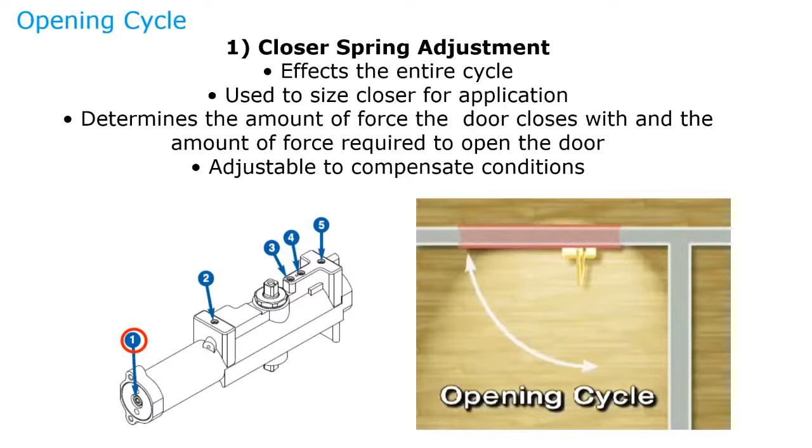Next, you have the back check. The back check is critical. The back check actually slows the door down as it hits the 70-degree point. This way it doesn't slam into a wall behind it. If for some reason your door opens up, and say you don't have a wall behind the door and it's allowed to open up to 180 degrees, then you would just back out the back check valve, and therefore it would be allowed to swing even further. This takes place normally around 70 degrees.

The next is the delayed action. This is the one option on door closers. Door closers don't normally come with this option, but you can order it. The nice thing is this will hold the door open for about 20 seconds, and during the 20 seconds, the door will close very slowly. It's a great feature for hospitals and places where you're bringing carts and gurneys through because it will hold the door open. It's really not a great option for external doors because it will let a lot of heat and cold in.

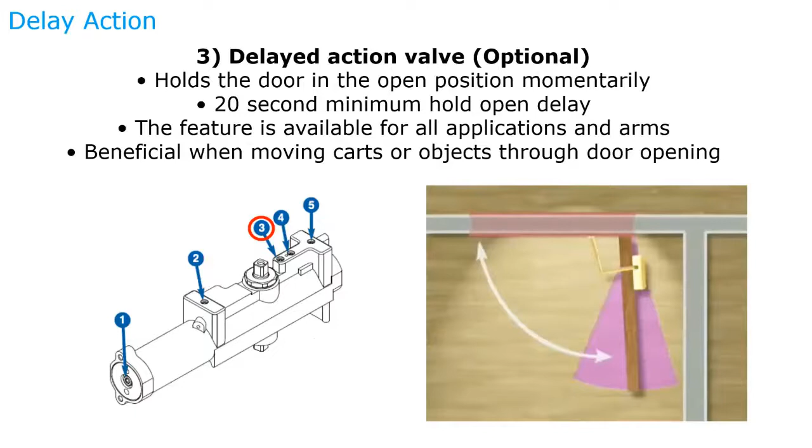Our next is our closing speed. Our closing speed is from the 90-degree point all the way to about the 12-degree point. This should take at least 5 seconds as a minimum. Most installers set it for about 7 seconds; make sure you don't have it closing too fast. According to ADA, 5 seconds is the minimum.

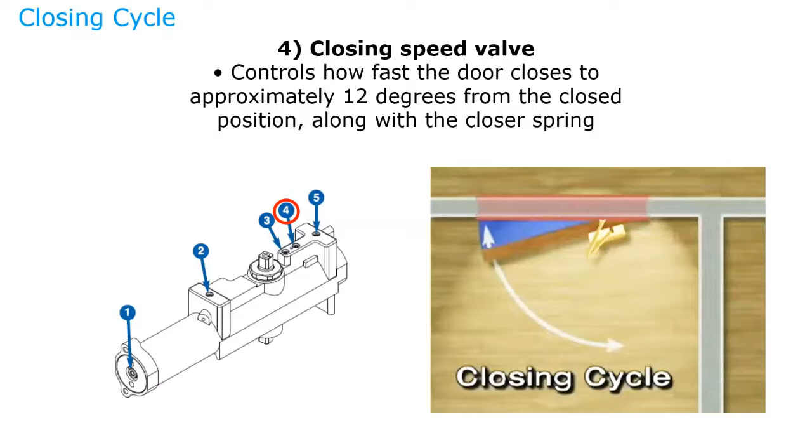And lastly, we have the latch speed valve. This is probably the most critical because this is going to make sure that the door closes and latches every time. Oftentimes you'll see the door closing very, very slowly, and at the very end, it speeds up. This is where the latch speed valve comes into effect, and this will overcome any weather stripping and make sure the latch bolts get pushed back and the door can close completely. This is the latch speed valve.

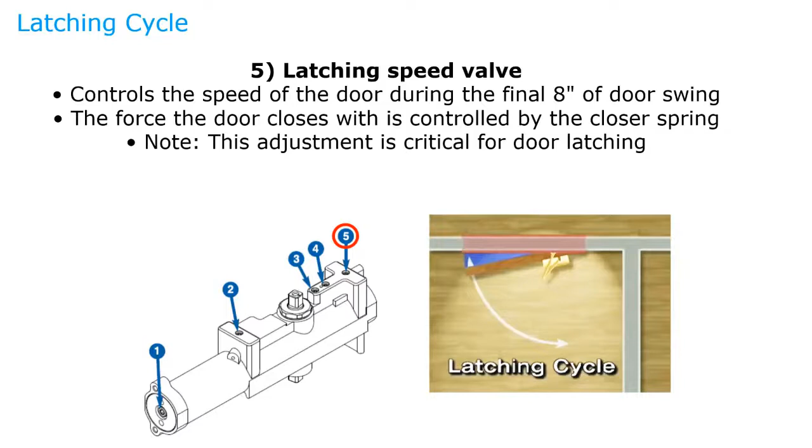As I just mentioned, according to ANSI A117.1, which is basically ADA, from the 90-degree point down to the 12-degree point, it must take more than 5 seconds. It can take 20 seconds, but it has to be more than 5 seconds. There's no maximum on how long it can take, but there is a minimum.

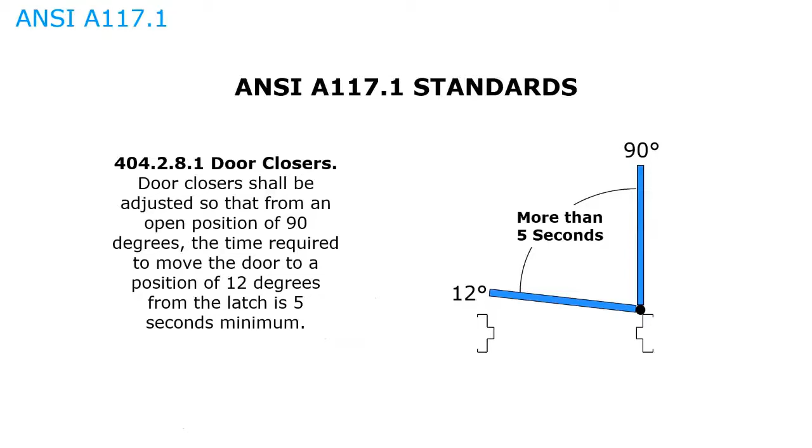Another very important ANSI A117 standard you should be aware of is that the maximum force to push open or pull open doors other than fire-rated doors should be 5 pounds for interior hinge doors. So when you're trying to pull the door open, it should be no more than 5 pounds. Something like this could easily be measured with a fish scale, where you put the fish scale on it, you unlatch the door, and then you pull the door open slowly. This should be under 5 pounds.

As you see here, there's a special note for fire-rated doors. Fire-rated doors have the minimum force allowed by the appropriate authority having jurisdiction. What that means is, say there's a lot of draft in the building, and a fire-rated door always has to close and latch. That's mandatory. And if you have permission from the authority having jurisdiction, and they say yes, you can actually increase the force of that to make sure it closes every time, that is allowed. So you can do it, because don't forget, fire safety is more important than ADA, because fire-rated doors have to do with life safety.

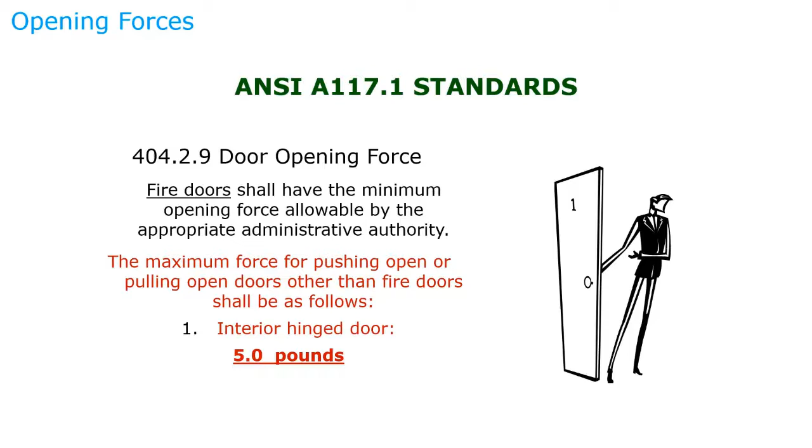We're going to take a quick look at installation, because this can be important, and you can always just take measurements to see if it's actually installed correctly. Because if it's not installed correctly, no matter what you do, you're not going to be able to fix the problem. So the first one we're going to look at is called a standard or a regular mount. It's always mounted on the pull side of the door.

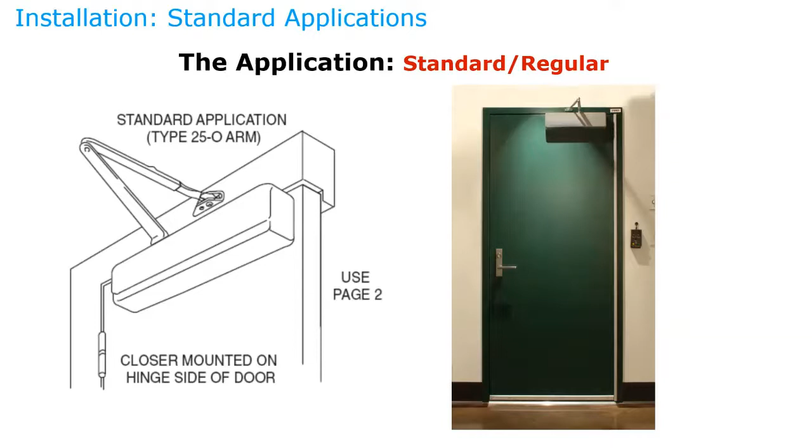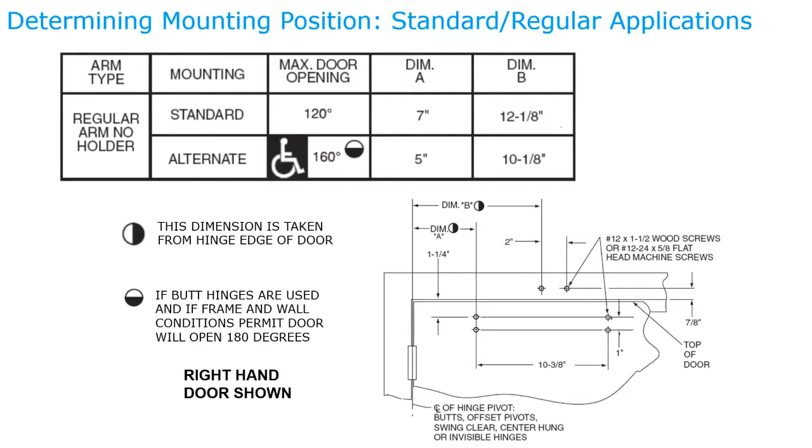Dimension A is from the center line of the pivot to the first mounting holes for the door closer. And you see it changes from 7 inches to 5 inches. So it does make a big difference. So if there's a wall directly behind it, it should be mounted at 7 inches, and this can easily be checked. And the arm should be 12 1/8 inches away. These are from the instruction sheets, and they can be seen on the sargentlock.com website.

Another important thing to look at: by just taking off the cover, you can tell which side the spring adjustment is at. For a standard or a regular application, this should always be away from the hinge. So it's always away from the hinge. When this is installed, the installer has a few adjustments that he can make on this.

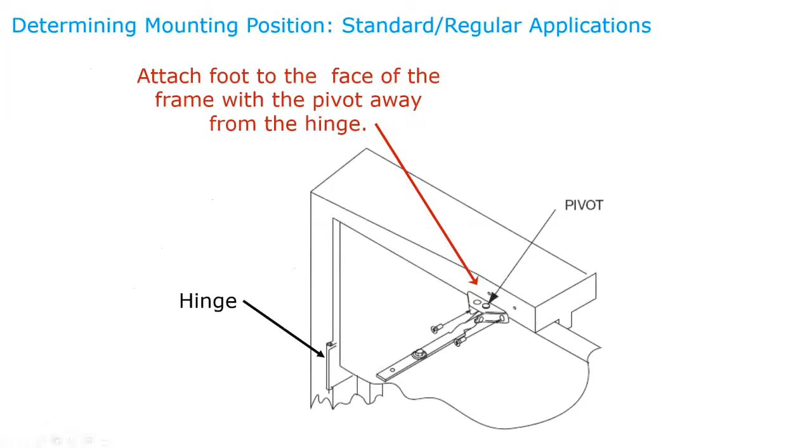Normally, you're going to attach the foot to the frame shown here with the pivot point further away from the hinge. The reason they give you 2 different pivot points is because the second pivot point will actually give you additional strength. So if you're not getting enough oomph to get the door closed, by just moving this over, a very small and simple adjustment, you can actually increase the amount of force that it takes to close the door, increasing the strength of the door.

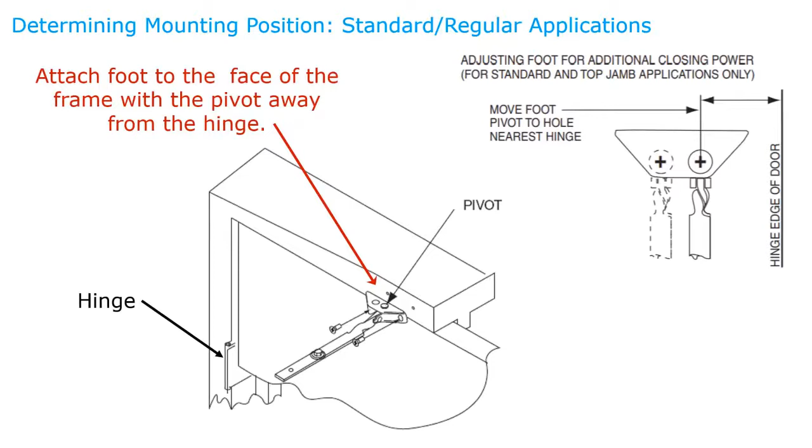Also, a very important thing when you're looking at standard or regular applications: the arm coming off the frame, this arm here, should always be at 90 degrees. If this is not at 90 degrees, it is not installed correctly. Keep in mind, when an installer first installs the arm onto the door closer, it comes off at 90 degrees from the door closer. What you need to put on is what we call the preload.

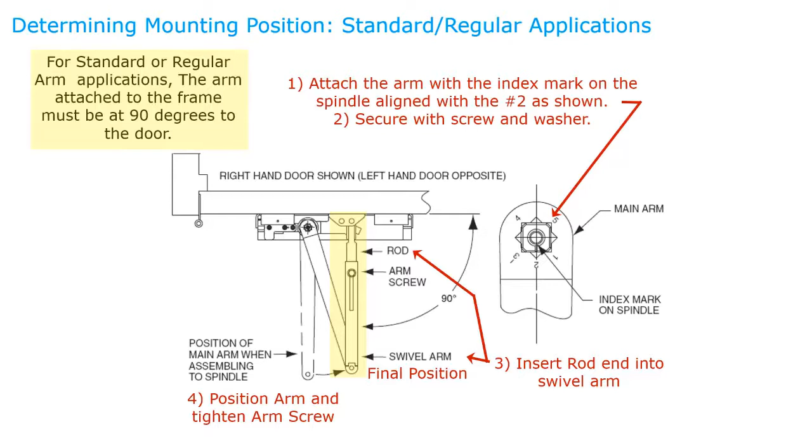So rotating it, as we show here, into its final position is called the preload, and that's going to make sure that all the valves take place at the right point in time. So that is critical, and that's going to make sure that everything takes effect properly. So once again, when you're looking at a standard or a regular application, you always want to make sure that this arm here is perpendicular to the opening.

The next application we're going to look at is top jamb application. Top jamb application is good for exterior doors, and it retains about 80% of the closing force. And if you take a good look at it, basically this is the standard application mounted upside down with a different configuration. This will allow the door to open up to 180 degrees, and this is always mounted on the push side of the door.

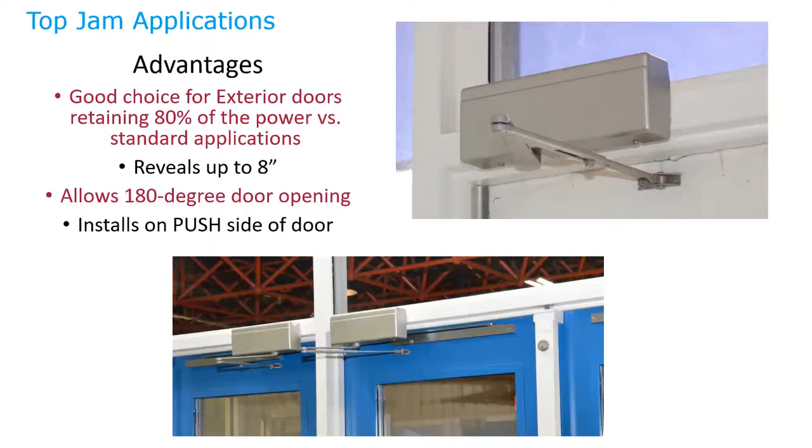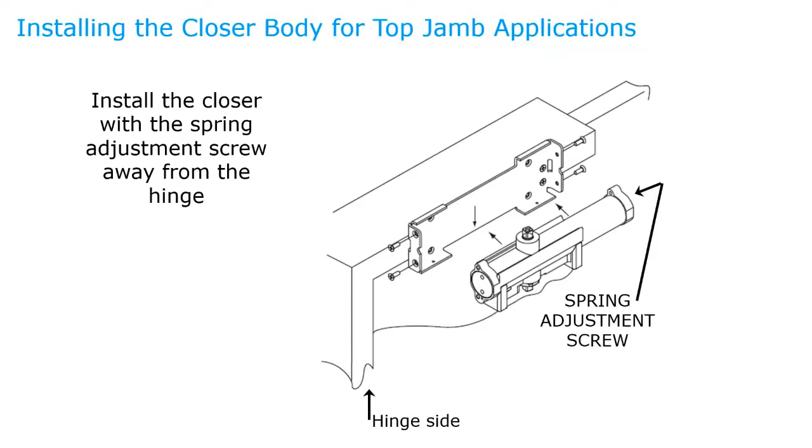As you can see here, the door closer is actually mounted on the frame itself. So you always have to make sure you have room on the frame to mount it. Okay. Once again, when you're installing this, the spring adjustment screw is going to be away from the hinge. This can be installed either way because these have spindles at both ends. So you can easily install this the other way and not know you've installed it incorrectly. And if the installer is not reading the directions, he can easily do that. So that's critical. So the spring adjustment screw has to be away from the hinge once again.

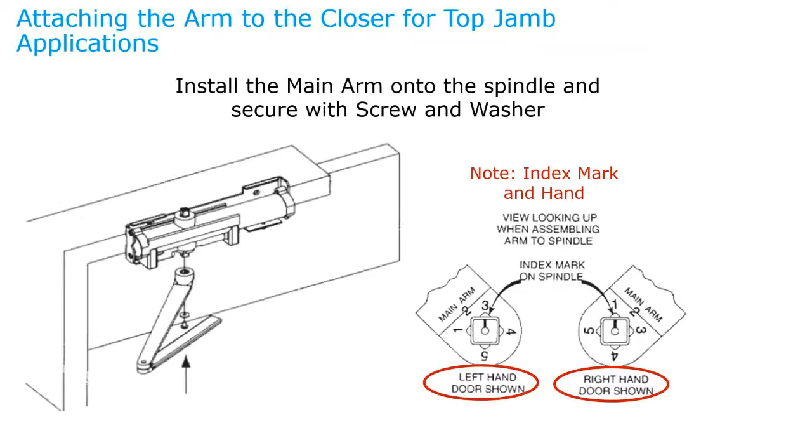And with Sargent, which is really nice, is we give you index numbers. Right in the instruction sheets, depending on how it's being mounted, it will tell you what index number you need. So here it's showing you for a left-hand door, the index mark, which is on the square spindle, is going to be on number 3. And for a right-hand door, it's on a number 1. By making sure it's always on the correct index mark, it's always going to help you with the installation.

And once again, you need to make the final adjustment. This is called the preload. When the door is finally installed and everything's installed, this arm here should be coming off the door approximately at 90 degrees. Okay, this is going to make sure all the valves come in correctly. And this is the arm coming off the door closer, not the frame. Remember, with the standard application, the arm coming off the frame had to be at 90 degrees. With this one here, the arm coming off the door closer itself has to be at 90 degrees. And because it's mounted upside down with different dimensions, that's why it changes. But it still has to be at 90 degrees.

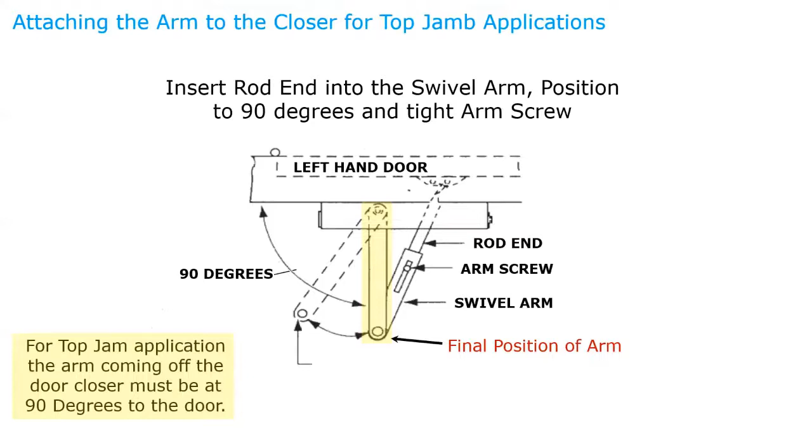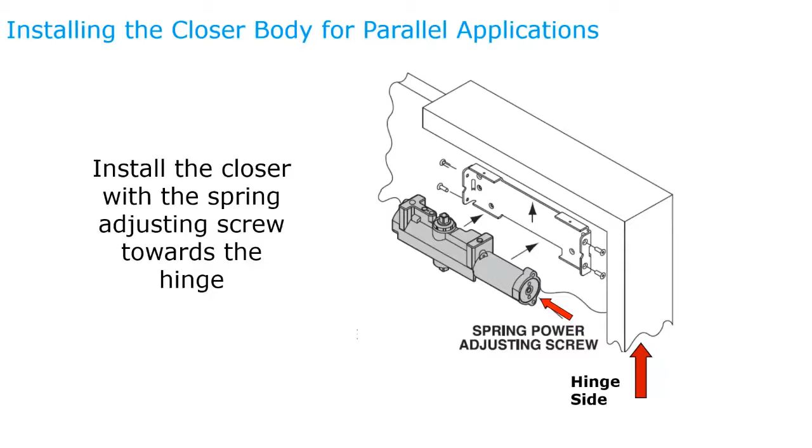The last application we're going to take a quick look at is the parallel application. Okay. First off, once again, with this one here, unlike the other two, the spring adjusting screw is going to be towards the hinge this time, not away from the hinge. The other two times it was away from the hinge, this time it's towards the hinge. So if the installer's not paying attention, he can actually install this either way.

Once again, you always have to follow the index marks. So here we're showing you for a left-hand door, it's going to have an index mark of number 4, and for a right-hand door it will be a number 5. This simplifies the whole installation. With some manufacturers, they basically tell you to rotate the bottom spindle and slide the wrench on. By having the index numbers, you know you have it installed correctly.

And once you make the final adjustments, this pivot point should be about 1 inch to 1.5 inches off the face of the door. If it's ever resting on the door, that's in the wrong position. That means the preload is not going to be there. So it's very important that you actually make sure it's 1 inch to 1.5 inches off the face of the door.

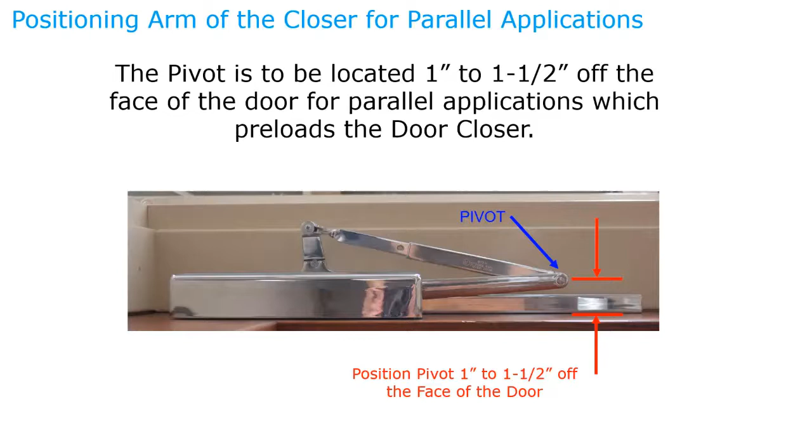The next thing I'm going to show you is one of the best videos I've ever seen that shows you what each of the valves does one at a time. When this video starts up, it starts up very quickly. And all the valves in this door closer are actually all open right now. So the door is basically swinging freely. Let's take a look. As you see, it smashed against the back wall and it's slamming here. So they're going to adjust one valve at a time to show you what each valve does.

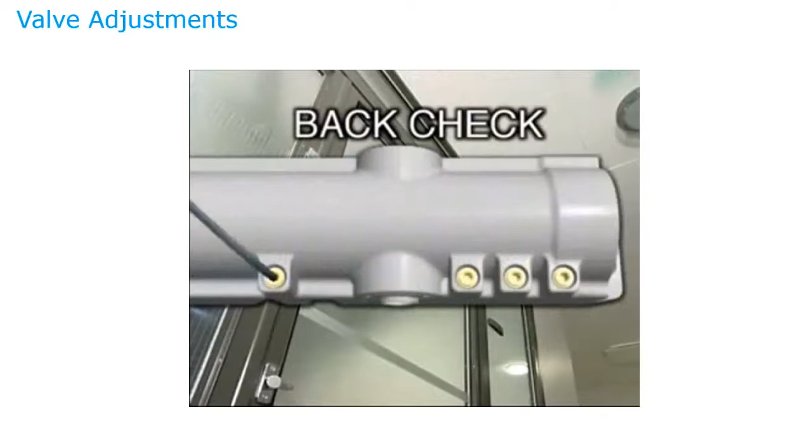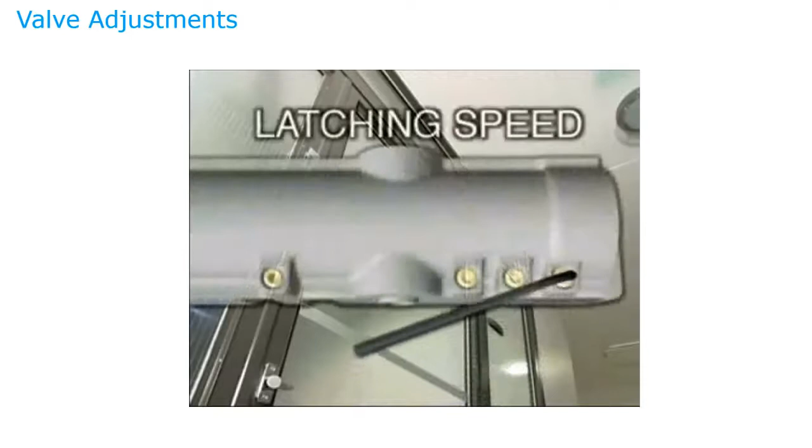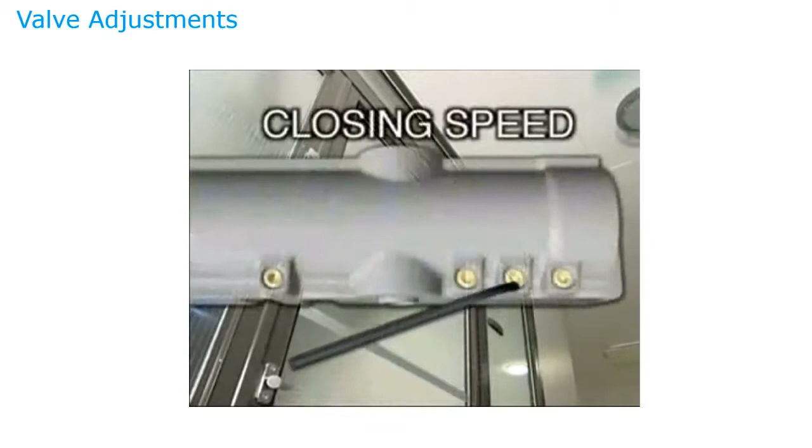This is the back check valve. This is going to slow the door down around the 70-degree mark. It no longer hits the wall, which is really nice, but it's still slamming and very loud. Next, we're going to adjust the latching speed. This is going to be the last little bit, the last 12 degrees of the closing. Okay, so at that point right there, the latching valve took over and slowed it down so it's nice and quiet. The closing speed has to be more than 5 seconds according to ADA.

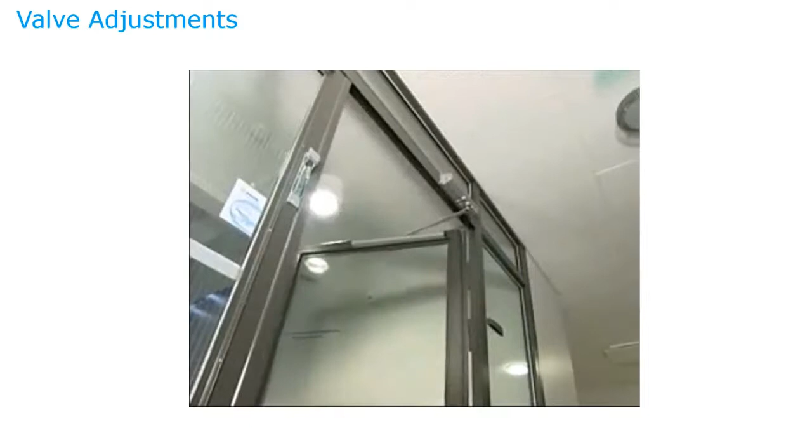And there it's closing nice and quietly.

Next is a delayed action. Nobody realizes how long 20 seconds is until you're sitting here watching it, or when the door is open and it's 0 degrees outside. So when you have the delayed action, it will hold the door open for an extended period of time. Keep in mind, this is great for interior doors where you're bringing carts and gurneys through, but on exterior doors, you're letting a lot of heat or cold in. And then you get the polite people trying to pull the door closed for you. But this gives you a real good idea of how long 20 seconds is. It's a lot longer than you realize. When you say 20 seconds, it's a while.

And that shows you what each of the valves does, and how to adjust it. Next, we're going to show you another quick way. If you have a door closer already installed but want to make some adjustments because it's slamming or something's not adjusted correctly, we'll show you how to make sure all the valves are taking place at the right point in time, and how to do this quickly. This is how to adjust a door closer once it's already been installed.

The door closer I'm going to show you how to adjust today is the Sargent 1431, but this would work the same way with any of our models with ASSA Abloy, Norton, Sargent, Corbin Russwin, Yale. Any of those would adjust very similarly to this, as long as we have a back check valve, a closing or sweep speed valve, a latching valve, and a power adjustment.

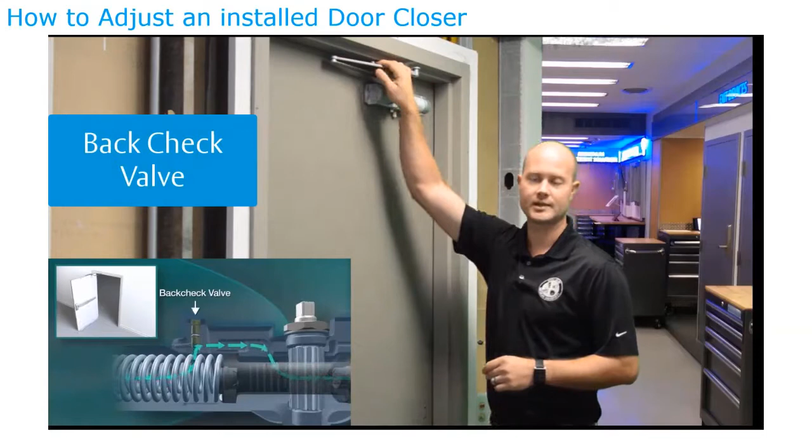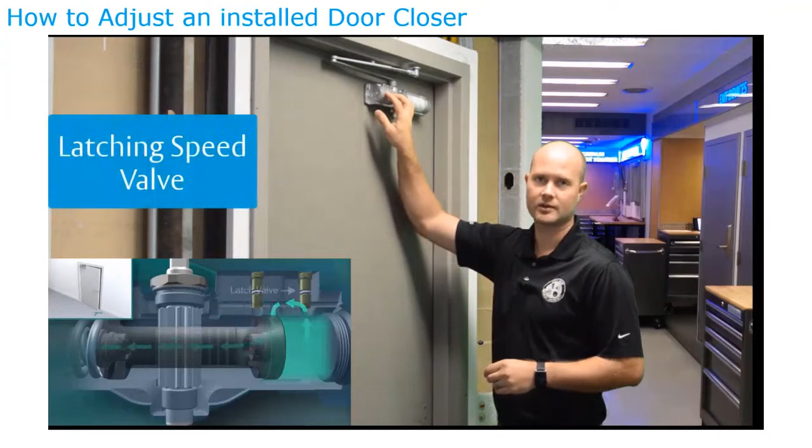On our back check side, our back check valve is here, noted by a B on our closer body. That prevents the door from slamming into a wall or window, and prevents wind from catching the closer and pulling on the arm unnecessarily. We're going to adjust that. Next, we're going to adjust our closing speed valve, or sweep speed valve, and also our latching speed valve, and demonstrate exactly what those valves do and how they function.

So with the door open now, you notice that I'm putting pressure on the door, but the door's not opening. That's because I'm restricting oil from passing through the back check valve. When oil is restricted, the door doesn't open. I need to take my 1/8 inch Allen wrench and actually back that valve out. So a minute ago we turned it clockwise, now we're going to turn it counterclockwise, and all of a sudden the door will start to open further.

Okay, you can feel that cushion that we need. Now if I let go of the door, not touching it right now, it's not going to close because I'm preventing oil from running through my closing speed valve.

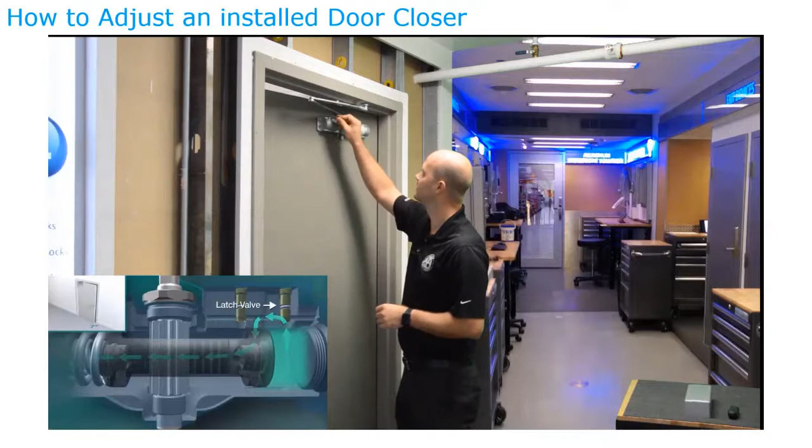I'll take my Allen wrench and loosen my closing speed valve until I get the timing that I want. Now notice the door closed to a certain point. This last few degrees of our closing is our latch position. The door will not close as long as our latch valve is screwed in, so we need to back our latch valve out to allow our door to finish closing.

Okay, so we're really close to having a perfectly adjusted door closer, but now we need to check it. I'm going to forcibly push on the door to check my back check. Once we get our back check perfect, then I'll let the door close, and we'll actually use our watch to time the door closing from a 90-degree open position.

Right there, the back check was a little too loose. So we'll give our back check half a turn and try that again. Right there, that's about what we want for our back check. The door did not stop abruptly, but came to a stop with kind of a cushion. That's what we want.

Next, I'll open the door to the 90-degree point and actually time it with my watch. 2, 3, 4, 5, 6, 7. It's a little fast, so we'll slow down our sweep or closing speed. Give that just about a quarter turn and see what that gives us.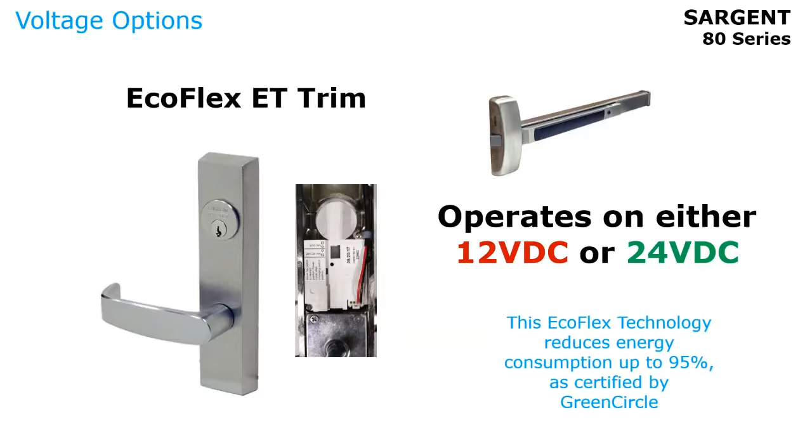Next, I want to touch on electric latch retraction. There's basically two types of electric latch retractions out there. The first one is a solenoid type. The second one is a motorized type. One thing to keep in mind, there are differences between these two.

When it comes to the power supply, the solenoid type usually requires a controller. It requires a controller because a solenoid requires a larger amount of electricity to get it initially moving. And therefore, you need to have a capacitor in there in your power supply, and that's why they call it a controller. The nice thing with a standard motor, you can use anybody's power supply you want.

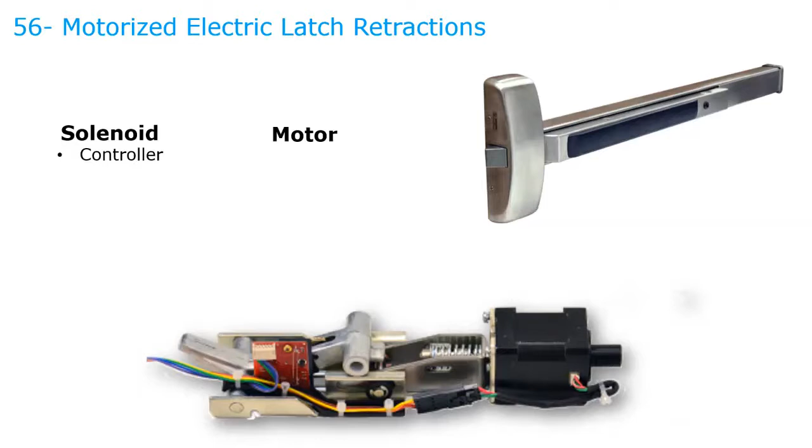The next thing you need to consider, due to the large inrush, you have to consider how you're going to transfer the electricity from the door to the frame. With motors, you don't have any inrush, so you can use a standard electric hinge without any problems. Oftentimes, when you have one of the large solenoids, they recommend an EPT to run the power from the frame to the door, but that's a lot more door prep and frame prep. Also, solenoids are going to be considerably louder than motors, and motors are very quiet.

The big advantage with solenoids is that they are faster than motors are. Motors are a little bit slower.

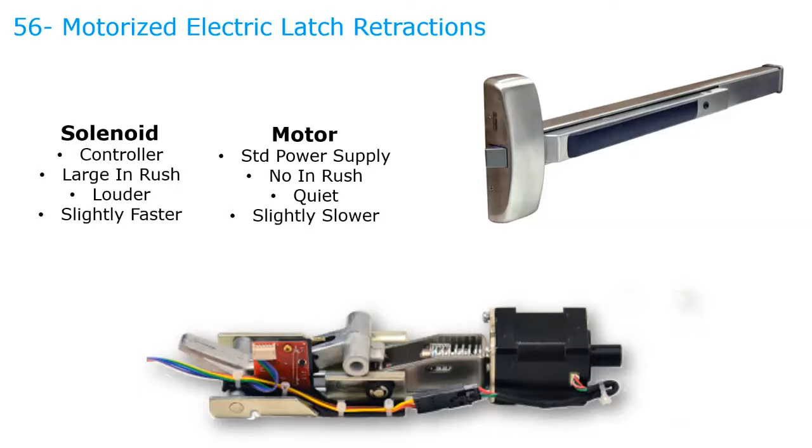And this is the reason why many manufacturers are now making their exit devices with a motorized design, because this is a better design. And this is the type of design that Sargent has always had. They have never had a solenoid operated electric latch retraction.

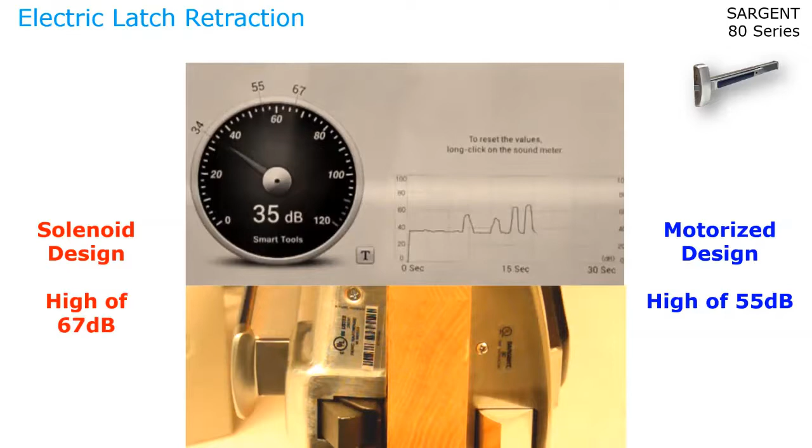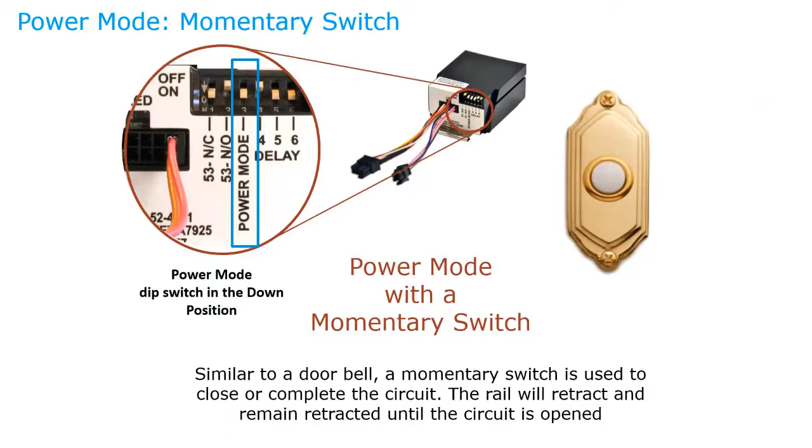The other nice thing with our electric latch retraction is that you have two different modes that you can use this in. You have either a power mode or you have a timer mode. When it's in the power mode, that means this third toggle here is going to be in the down position like I'm showing you here. If you're using it in the power mode and you're using it with a momentary switch, like a doorbell switch, when you press the button in, the rail will retract. When you release the button, the rail will become undogged. So it only stays in as long as you're holding the button in because it's a momentary switch.

You can also use the power mode with a maintain switch. So if you want the door to be open from 8 o'clock in the morning to 5 o'clock in the afternoon, then you can just hit the switch, have it dog itself at 8 a.m. in the morning, and then have it undog itself at 5 p.m.

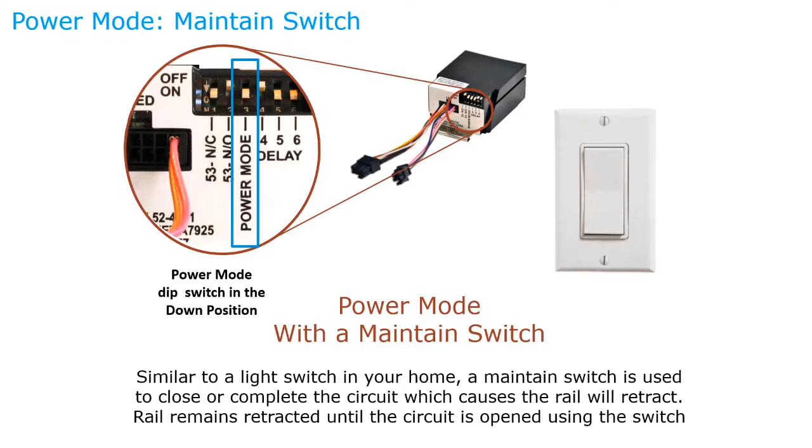And that's where you would use a maintain switch, or you could use that on a timer. This device also has what they call the timer mode, which has a 20-second timer built right into it.

So if you're going to use the timer mode, first thing you need to do is slide this toggle so it's in the up position, and that puts it into the timer mode.

You're going to be using the timer mode with a momentary type switch. The idea is that when you initiate it with the momentary switch, the rail will stay in for a set period of time from 0 to 20 seconds. It's normally preset at 5 seconds, but you can adjust that up to 20 seconds.

This gives people the chance to reach over and grab the door open. So if they present their card, they then have to grab the door—by having it stay open longer, it just gives them more time to pull the door open.

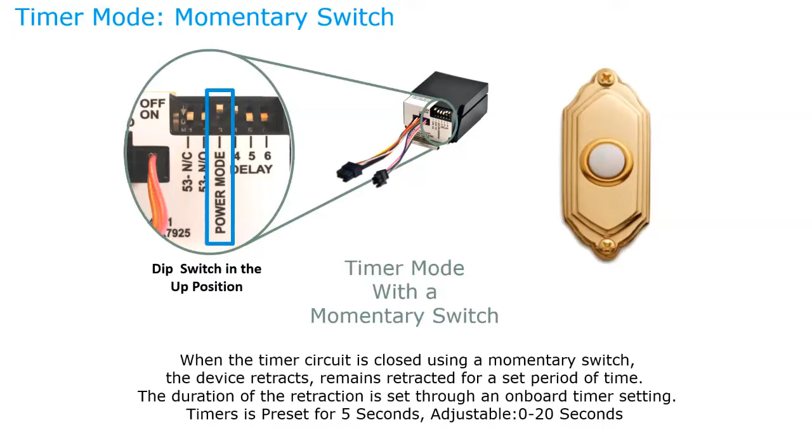If you use the timer mode with a maintain switch, the timer is not going to take any effect at all, so it's irrelevant. You would only use the timer mode with a momentary switch. And this is how you adjust the timer from 0 to 20 seconds.

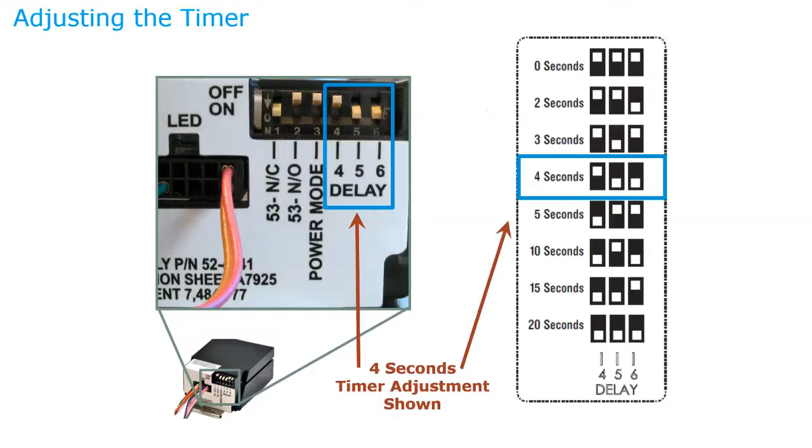One other very important thing I want to mention is that if you're going to be using this with a low energy operator—and a lot of people are using these with low energy operators to meet ADA requirements, where they can hit just a handicap button—the exit device is electrified, pulls in the latch bolt, and then the low energy operator would open the door.

You have to leave enough time for the latch bolt to retract, because if the button is hit and the exit device latch bolt is still extended while the low energy operator is trying to pull the door open, the exit device is going to win every time. And you don't want to damage your low energy operator.

So it's very important, and this is a delay that's built into the low energy operator that you can adjust. This is a pretty simple adjustment, because you should actually be having your electric latch retraction controlled by your low energy operator. And if you're not aware of it, Norton's low energy operators, most of them have a 24-volt power supply built right into them.

If you're using a Norton operator with the Sargent electric latch retraction, you don't even need a power supply, because the power supply is already in the operator. Okay, that brings us there.

The next one we're going to talk about is self-contained delayed egress devices, also known as delayed egress devices. We're going to be talking about Sargent's 59 series.

If you're not familiar with these, they're used all over in maternity wards, airports, Alzheimer's wards. What they do is they prevent someone from going through the opening for 15 seconds.

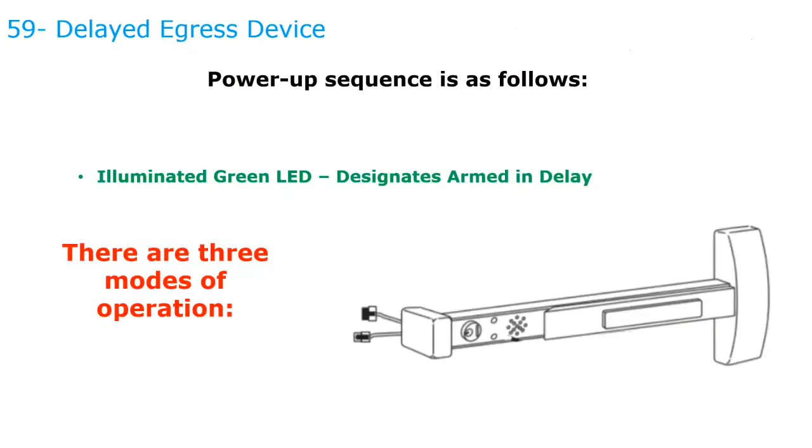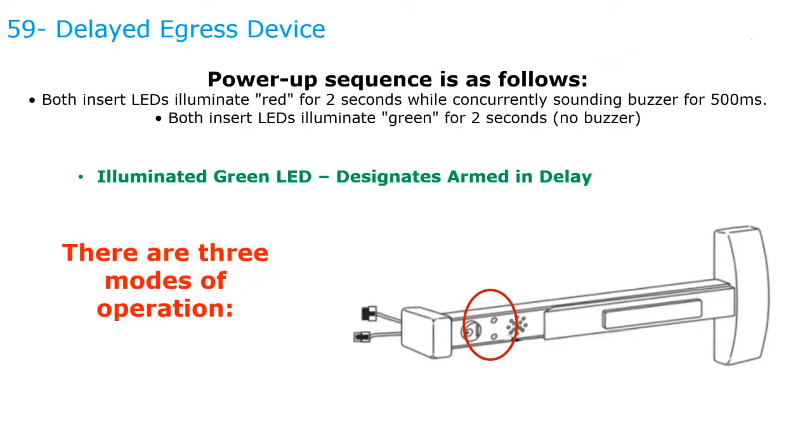When you first power up your delayed egress device, both of the LEDs in the insert will illuminate red for 2 seconds, and the buzzer will buzz for half a second. Then both LEDs will turn green for 2 seconds, after which point, if either one of the LEDs illuminates red, that's significant.

That designates that it is in the maintained egress mode, which means people can go through the opening. If either light is illuminating green, and right now you see that it's green on our drawing here, that means it is armed and will prevent egress—nobody can get through this door for 15 seconds.

Okay, there are basically 3 different modes when it comes to delayed egress devices.

There's the armed, which means preventing someone from egressing for 15 seconds. After the 15 seconds, they can get out. Then you have momentary egress. This is how you allow someone to exit without setting off the alarm.

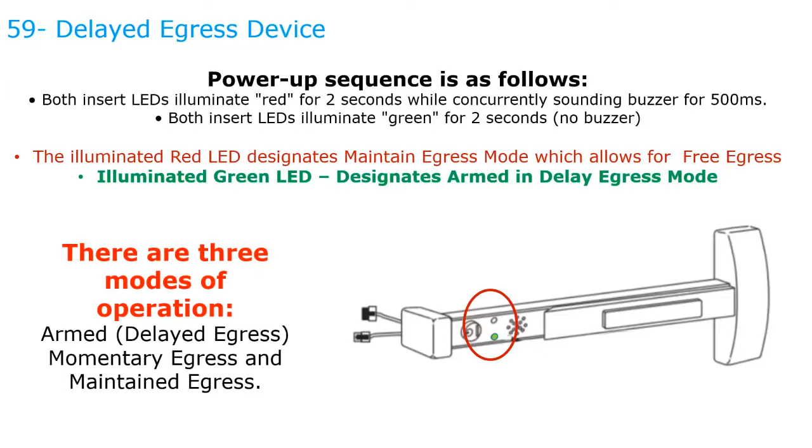So they would maybe punch in a code or something, or you can just use the key on the insert in the exit device to set momentary egress. It will turn off the system for 5 seconds, but this is adjustable up to 40 seconds. And then it will rearm itself immediately after that, or you can leave it in the maintain egress, which means basically it's allowing you to exit.

So in the armed mode, the armed mode is designated when the rail is armed. The latch bolt cannot be retracted by pushing in on the rail for immediate egress. If the rail is depressed for 1 second or more, the alarm will sound and initiate a 15-second timer. And then after the 15-second timer counts down, then it will allow free egress.

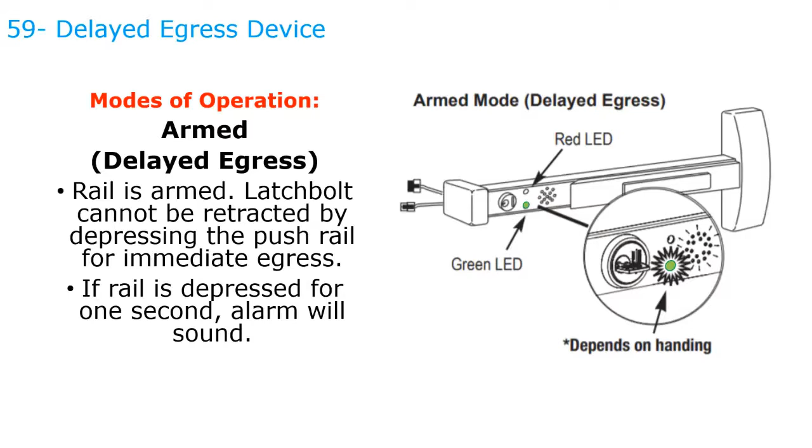Okay, so this is in the armed mode. The standard color for this is going to be the green LED. So when you see the green LED, that means it's armed and you cannot get through the door. Next is a momentary egress. If you're exiting in the armed mode,

okay. If you want to exit, say if your device is in the armed mode right now and you want to exit momentarily, what you're going to do is you're going to stick the key into the cylinder right here, and you're going to rotate the key counterclockwise until you hear the second click. And then you're going to remove the key.

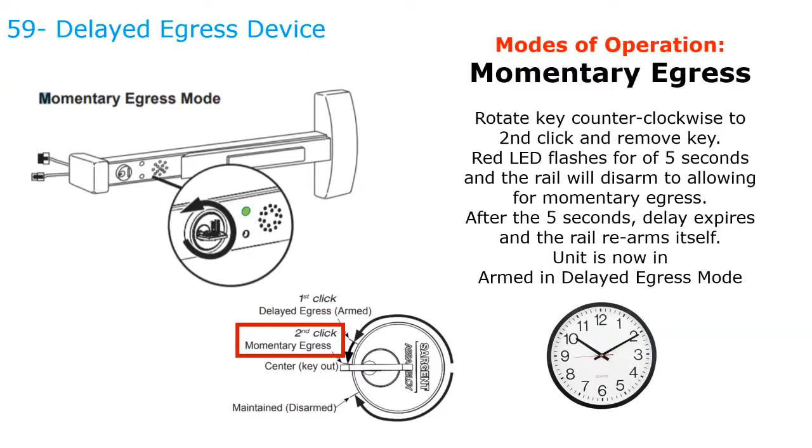The red LED will flash for 5 seconds, and that's the 5 seconds that it's going to allow you to exit. After those 5 seconds are up, it's going to rearm itself, and therefore preventing anyone from exiting. And this timer is adjustable. So that's the momentary egress that we're talking about. And you rotate it to the second click counterclockwise.

And our last one is our maintain egress. So if you want to put your exit device into a maintain egress mode, which basically means to turn off the electronics within the exit device to allow free egress, you want to rotate the key fully clockwise to the first click and then remove it.

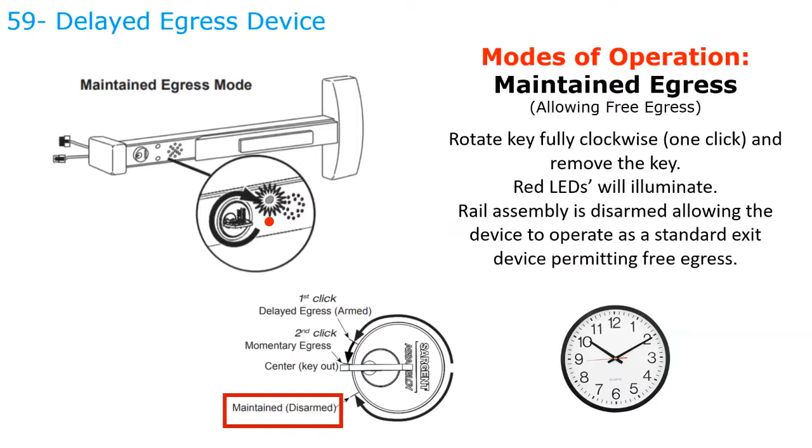The red LED will illuminate. And don't forget, the red LED will tell you that it is disarmed and will allow free egress. The exit device will operate like a standard exit device. So keep in mind, red means that you can exit, green means that you cannot exit.

So say if you want to rearm your exit device now. If you want to rearm your exit device, then you're going to stick the key in the cylinder, rotate it counterclockwise till you hear the first click, and then remove the key, at which point the green LED will illuminate, designating that the rail is now in the delayed egress mode, which means it's in the armed mode and will not allow egress.

Okay, so really quick on the colors, and these are standards, these are adjustable, and that's what we're going to go over quickly, because a lot of people do have a problem with green meaning armed and red meaning you can get out. So that can be changed. So the standard from the factory, green means that the device is armed and it's in the delayed egress mode and you cannot get out.

If it's red, it means it's in the disarmed mode, and it allows free egress. If the red is flashing, this means you have momentary egress, and that's adjustable, and we'll talk about that in a second, but that's for momentary egress.

And then if it's red and green alternating with a loud horn, that means the exit device has been violated. Okay, and that someone has gone through the opening. And that means someone's going to have to come over with the key and reset it according to NFPA 101. So that's what the different colors mean on that, and I'm going to explain how to adjust those in a moment.

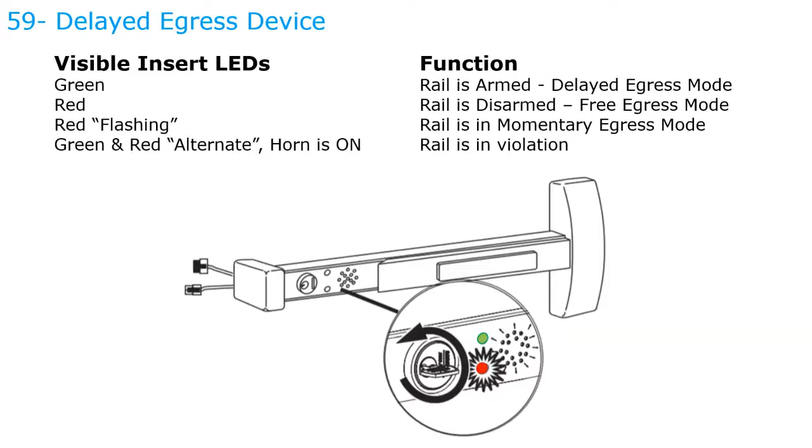Next thing, I want to just go over some of the diagnostic features, because it's very helpful. It has diagnostic features. So right here, if you remove the end cap, you're going to see four little lights here. Okay, the yellow light will illuminate when the latch bolt is pushed in, and will turn off when the latch bolt is released.

Okay, and this is a good way to tell if that switch is working. So once you've installed it, you push it on the latch bolt, that yellow light will turn on and off. The red light will illuminate when the push rail is depressed and turn off when the push rail is released. It's a good way of testing the push rail switch to make sure that's operating correctly.

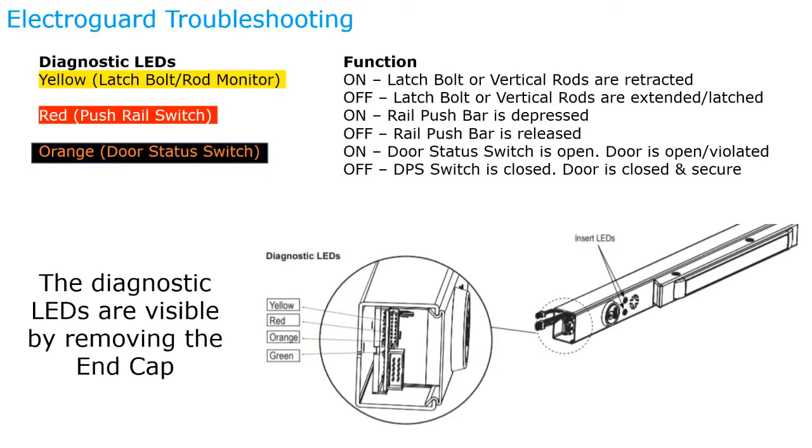Next is the orange LED. The orange LED will illuminate when the door is open and will turn off when the door is closed. This is going to be attached to the door position switch. And the last one, the green LED will illuminate when the magnet is magnetized within the rail and will turn off when the device is allowing free egress. Okay, so those are the basic devices.

So when the device is in the armed mode, what you should see back here is only the green LED should be on. Think about it for a second. When it's in the armed mode, you want the latch bolt fully extended, so it should be off. You want the push rail completely released, so the light should be off, and the door should be in the closed position, which means that light will be off. So you want only the green light showing.

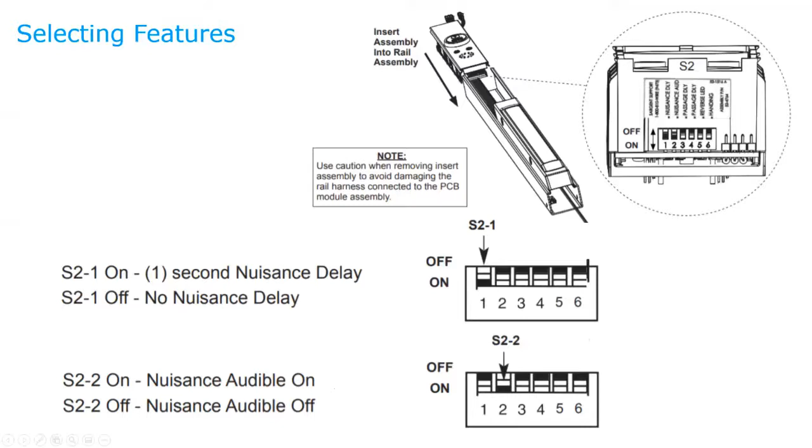When you turn off the device, the green light will also be off. And this is how it's great for diagnostics if you're trying to figure out which one of the switches is not operating properly. Remember I told you you can make some adjustments to this? If you pull the insert out slightly, right here in this area, you can see you have 6 toggles, and these toggles adjust different things, and that's what we're going to run through next.

Okay, so the first toggle that you see there is for the nuisance delay. When it's on, there's a 1 second nuisance delay, and when it's off, there is no nuisance delay. We would always recommend leaving the nuisance delay on, because this way it will prevent someone from setting off the alarm immediately. If the nuisance delay is not on, as soon as someone pushes on the rail, it immediately starts the 15-second countdown.

The next is the audible alarm with the nuisance delay. The second one is the nuisance audible. So when the audible is on, when you bump into the rail, you'll hear a beep, and then the person will back off the rail. So normally we'd always recommend that you have both the nuisance delay and the audible delay on. So if the rail is ever bumped, the person is notified immediately and they don't set the alarm off. Keep in mind, if these are off, then the rail will go into immediate countdown and the irreversible alarm.

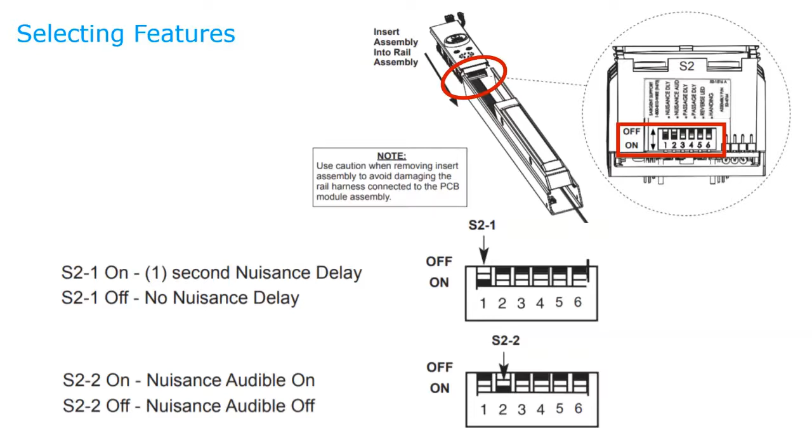The next 2 switches have to do with the momentary egress, depending on how long you want it adjusted. The default is 5 seconds, with both toggles in the off position. By putting both toggles into the on position, this will extend the momentary egress up to 40 seconds, which is a considerable amount of time. Keep in mind, the reason why it's set at 5 seconds is because you don't want someone following another person through that opening. The other optional times are 10 seconds, 20 seconds, and 40 seconds. And right here, the little chart shows you how to adjust it and which ones have to be on and off.

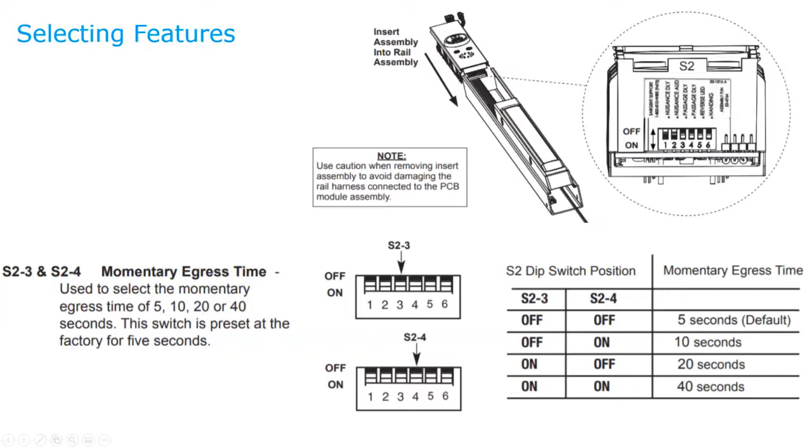And the last ones, which are probably the most important, is how to change the colors. A lot of people like to use opposite colors. So if you want red to mean armed and green to mean maintain mode, the S2-5 toggle controls the color of the LED. If the number 5 toggle is off, then the default green will illuminate, showing you that the device is armed.

If toggle 5 is in the on position, the red LED will indicate that the device is armed. So this will switch it. By putting toggle number 5 into the on position, it will show red, red meaning stop, and green will mean that it's not armed, allowing egress. You can also change which light is going to be on top.

Okay, so what they're suggesting for a right-hand reverse bevel switch, you want to go to the switch farthest to the right, and it should be on the on position. For the right-hand reverse bevel, it should be on the on position, and for a left-hand reverse bevel, it should be in the off position. And this will put the armed button at the top. And you can see there is quite a bit to the 59 dash.

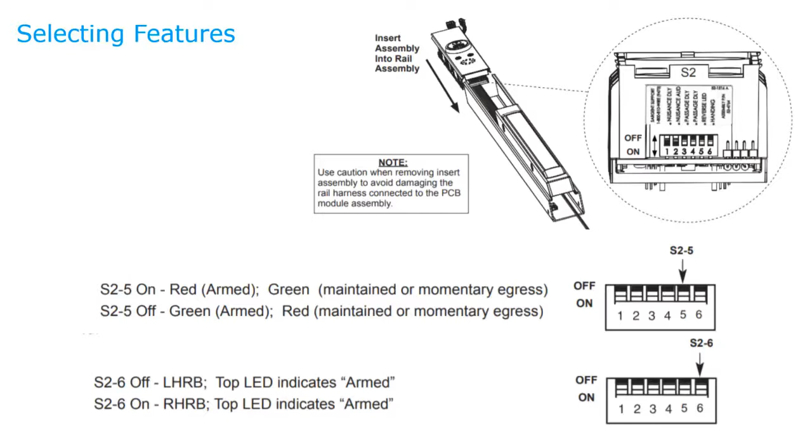The next thing we're going to touch on quickly is concealed vertical rod exit devices. One thing with concealed vertical rod is you have to consider certain things with the opening. If the exit device isn't installed yet, it's very important that you measure the gap between the very top of the door and the frame, because this gap cannot be too large. It's also critical that you measure the gap at the bottom of the door.

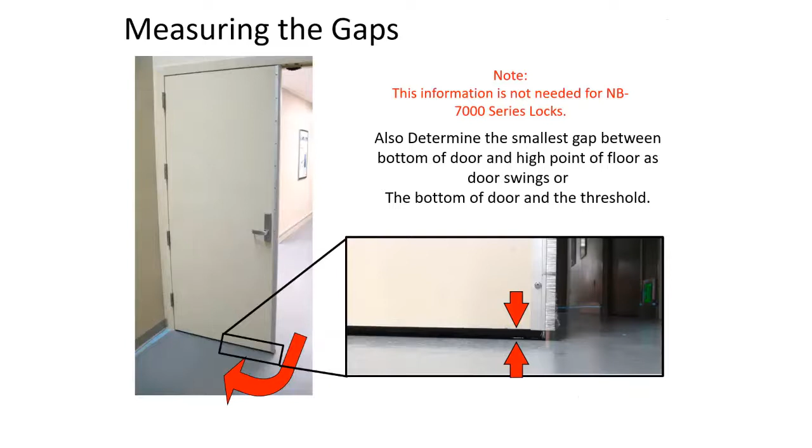Because if you ever have a situation like this, when the door is closed, you have an 1/8 inch gap between the bottom of the door and the floor. But when the door is fully open, you have 5/8 of an inch gap. This is not an issue. This will work out perfectly fine, and you'll have plenty of bottom bolt engagement, and it will not affect security.

But if the situation is the opposite way and the floor is not even, so when the door is in the closed position, you have 5/8 of a gap there, but when the door swings completely open, you're only going to have an 1/8 of an inch gap there. That's going to be a problem because you're not going to get any latch bolt engagement because the gaps are too big. That means they're either going to have to flatten the floor, they can install a threshold, or if it's a non-fire rated exit device, you can remove the bottom rod for the concealed vertical rod to eliminate that.

But that's one thing to be aware of. If the floor is uneven, it will cause a problem with the exit device and it will not operate properly. So this is a security issue when you have a large gap underneath the door, but when the door is fully open, you have a very small gap.

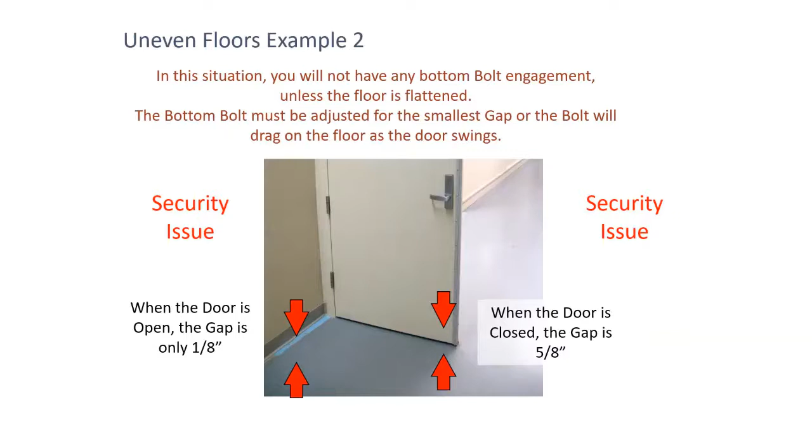As I was mentioning, you want to do this through the entire swing. Keep in mind, the purpose of this is a hold back button. When the door is open, this button comes out. When the door closes, it hits the frame, and then it releases the bolts to shoot out. So when you first push in on the bar, the rods go in and they stay in, and this button will cause them to release. So when the door closes, it gets pushed in and the rods will shoot out. So it's very important that it hits the frame.

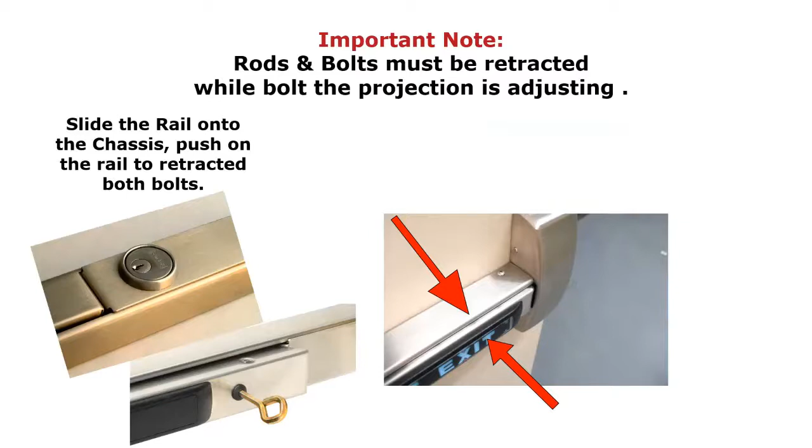So when you're adjusting vertical rods, you want to adjust them with the rail in the dogged position. Anytime you want to adjust the concealed vertical rods, always make sure that the rail is dogged. You can either do that with the cylinder dogging or with the hex key dogging, but you always want to make sure that the rail is on. Don't just do it by pushing on the bar, okay? This is how you're going to adjust the vertical rods.

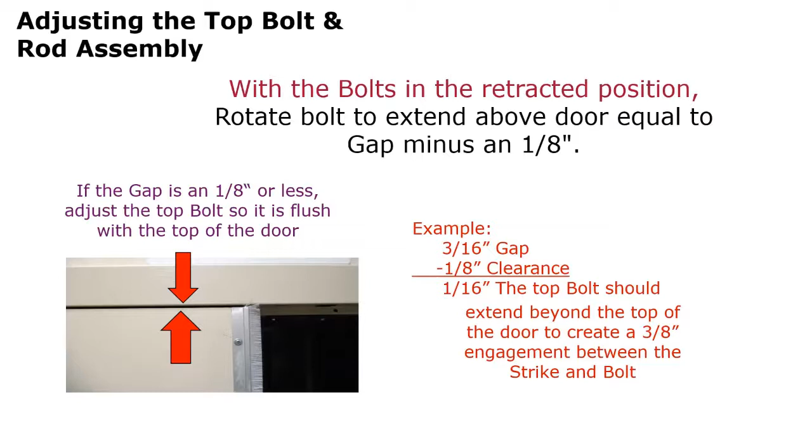Say if you have an 1/8 inch gap at the top of the door, which is what you want, you would make the top bolt flush with the top of the door. Therefore, you would have maximum engagement every time and it would never hit the frame. And that would avoid marks like this, because right here, this is telling you that the bolt is sticking out too far and it's hitting the top of the frame and it needs to be readjusted.

The second situation is, say if you have 5/8 of a gap at the bottom of the door, then the way you have to adjust the concealed vertical rod is you have to extend the bottom bolt all the way out a full 1/2 of an inch. So you have an 1/8 of an inch clearance between the top of the strike and the bottom of the bolt. Therefore, they'll never engage each other until it's in the undogged position. And this is how you would adjust the vertical rods for this.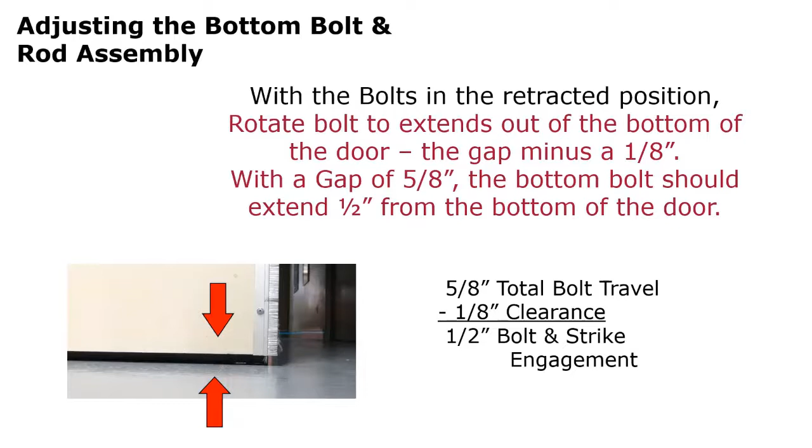So you always have to do it in the dogged position, so you push it on the rail and then you adjust it. And then once you install it, you should not have to do any other adjustments. Okay. When it comes to surface vertical rods, they are a little bit different than concealed vertical rods.

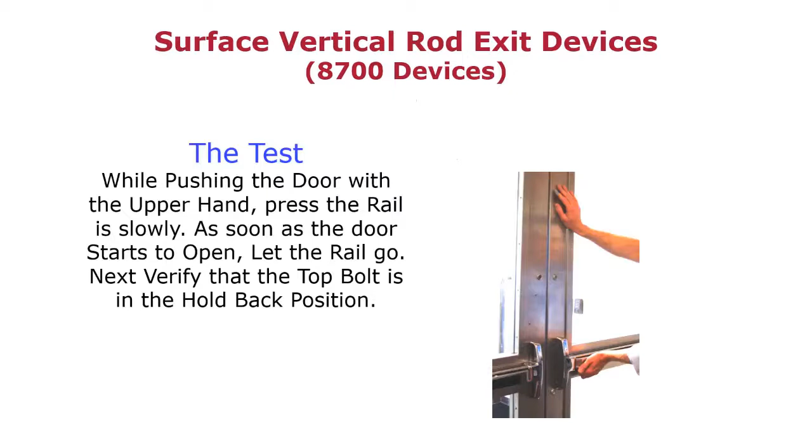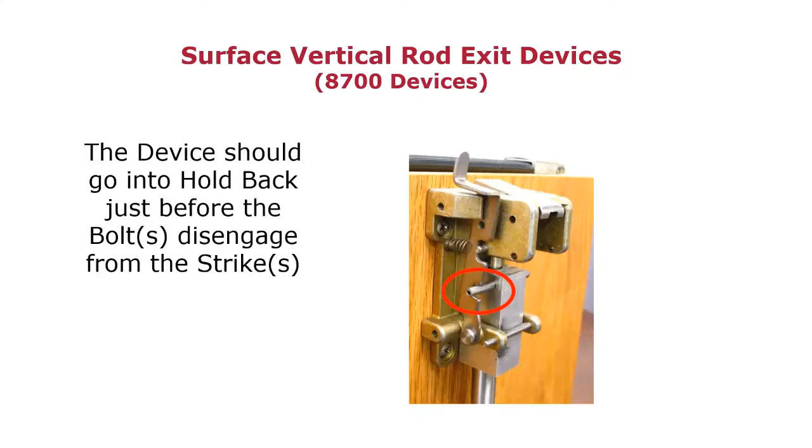When you're testing surface vertical rods, the best way to do that is by putting one hand on the door and pushing on the bar. As soon as the door opens, release the hand on the bar and make sure it goes into holdback. It's very critical that it goes into holdback. See, with Sargent's surface vertical rod, there's only one catch point for the holdback feature. So it's very important that this pin always drops into this spot to make sure it stays in the holdback position. Okay, so this is very critical.

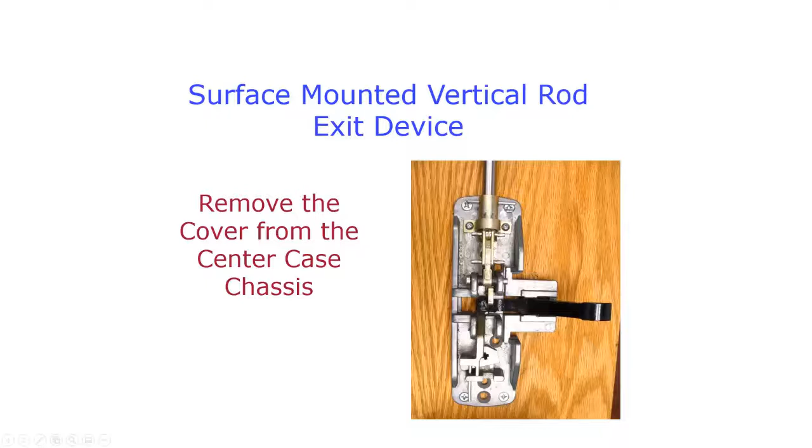One nice thing with Sargent, it's easy to adjust the vertical rods because you can adjust them all at the center of the door. Here's a look at the center case chassis. With Sargent, because it's pinned at the center of the door, once you remove the cover, you just have to remove this little pin here, and then you can rotate the rod with your fingers. And the best way to do this is looking up at the top case. You want to rotate clockwise to shorten it and counterclockwise to lengthen it.

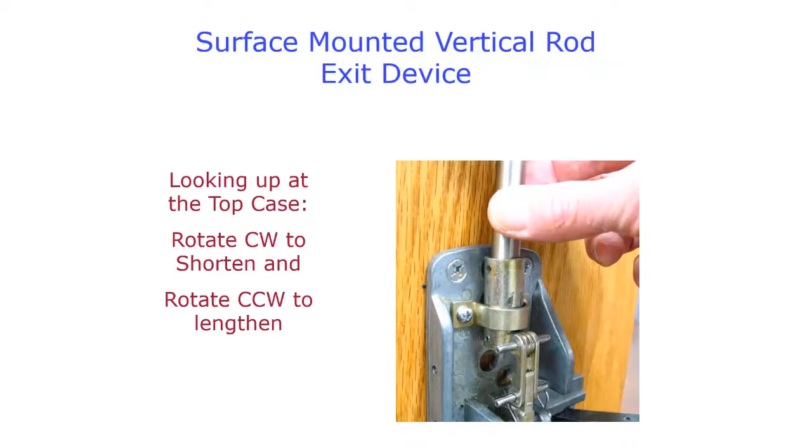Okay, so you can either extend the bolt up further to get more engagement or reduce the engagement. Okay, so basically you have to adjust it. You align the holes again, you put the pin back in, and you do have multiple holes, and you have to test it again. Make sure it goes into holdback every single time.

The most critical thing when it comes to surface vertical rods is you have to treat it like a little old lady going through the door. If you push on the bar quickly, it will always go into holdback without any issue. The thing that you need to consider is a little old lady going through the door very, very slowly. And if she doesn't push the bar in completely so it goes into the holdback position, you've lost security on the door because the bolts will stay extended and the door will not close and latch. And that is a problem.

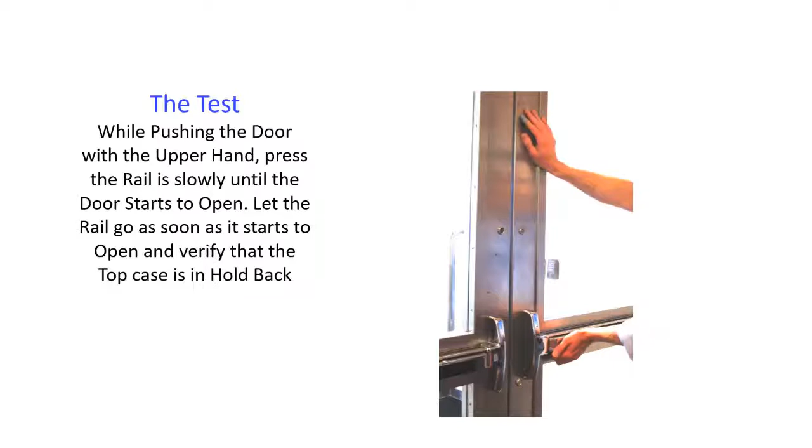So with surface vertical rods, you adjust them, you test them, you make another adjustment and you test them. The nice thing with concealed vertical rods, basically once you adjust it in the dogged position, you're all set there. And we'll touch on it really quick.

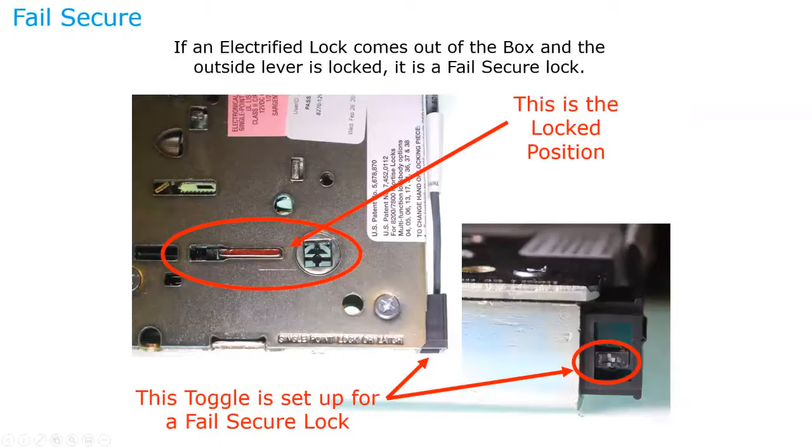With Sargent's mortise locks, if you're not aware of it, they are also field selectable between fail safe and fail secure. So when you have an electrified mortise lock, at the very bottom of this harness here, there'll be a little toggle, and you can switch it from fail safe to fail secure. So right here, I'm showing you a mortise lock that's in the fail secure position. And if you take a look at the toggle here, it's all the way to the right. By just pushing that toggle to the left, you've now put it into the fail safe position. So you can easily switch that if you order the wrong thing.

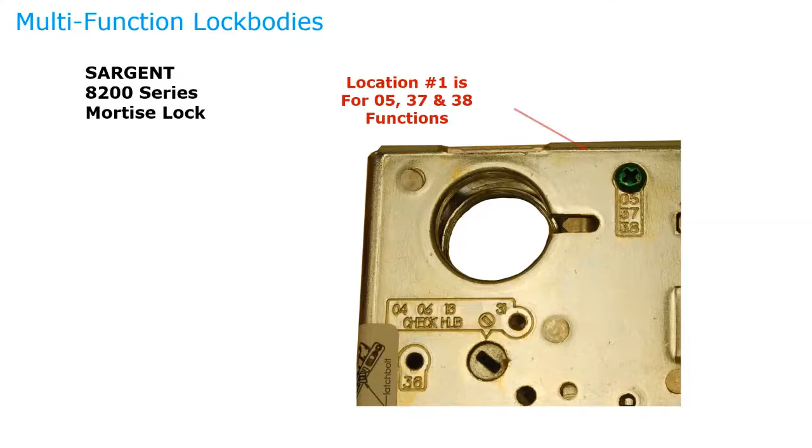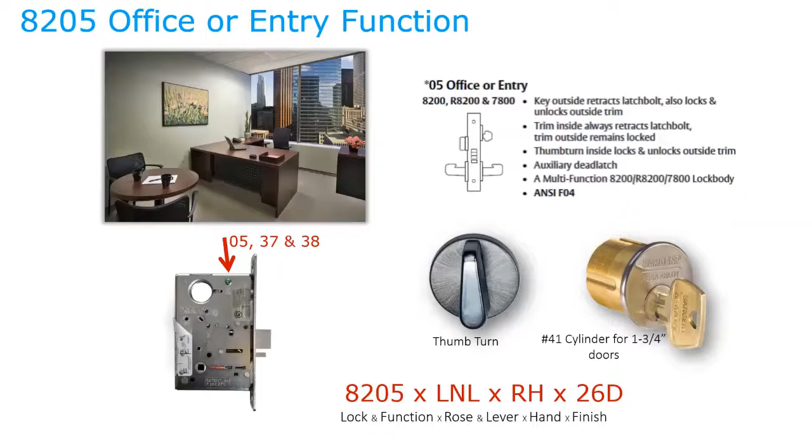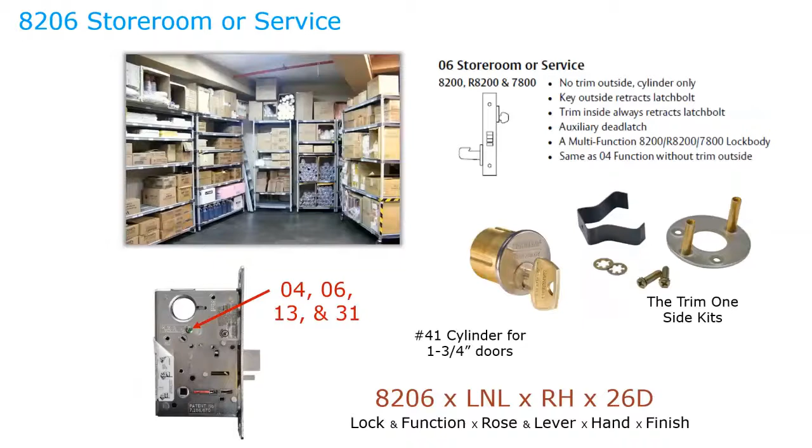And one last thing with Sargent, this 8200 series is a multi-function lock body. By moving this one green screw to these 3 different locations, you can make 8 different functions. Okay, and they all use the same cylinder cam. And the functions are an office function, a classroom function, a classroom security function, a storeroom function, a storeroom function with no lever on the outside, an exit only function, a closet function, and another closet function.

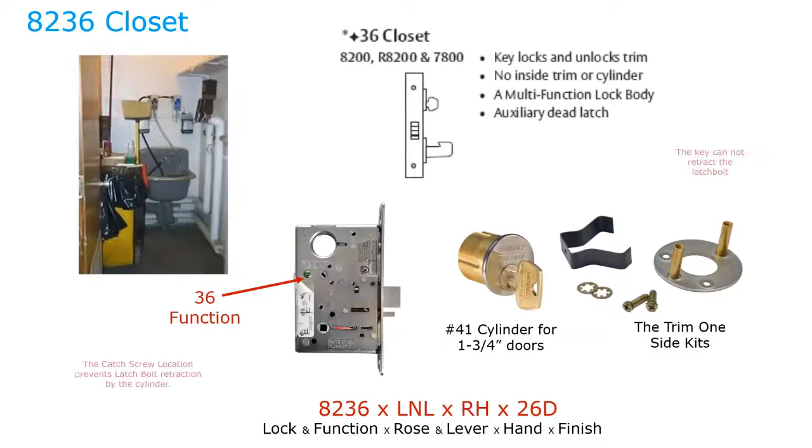We actually combined our 3 most popular functions into this one lock body. So we have classroom, storeroom, and office all built into this one lock body. Okay, and all you have to do is move that green screw. And that brings us to the end of this presentation.